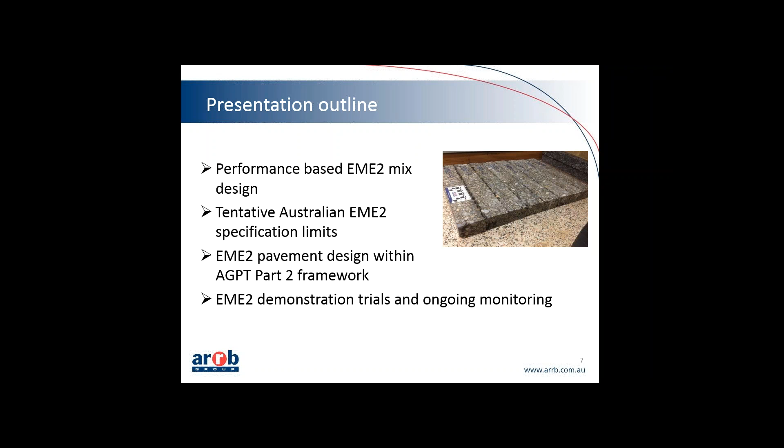Then EME2 pavement design within the Austroads guide. We've looked at how to use EME2 within the framework of the normal pavement design guide in Australia, and we'll be talking about that. And then finally we'll be talking about the EME2 demonstration trials that have been installed to date.

So then to Nizam's question, why would I be using EME2? Well, EME2 has got some quite unique properties when compared to conventional asphalt mixes. It's very workable due to the high binder content, but the end product is very stiff, hence the name, high modulus asphalt.

Rut resistant, it's fatigue resistant due to the high binder content, and finally it's moisture resistant. And this is thanks to the high binder content.

We're using about 6% binder by mass of aggregate, and that is of a hard binder. It's a new binder type for Australia, with a penetration value - so it's a European specification - a pen value of between 10 and 25.

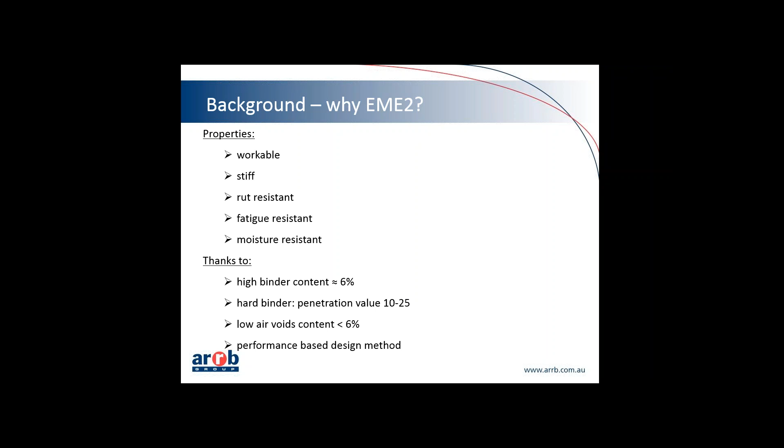It's compacted to a low air voids content, at least below 6%, but we aim for about 4% construction voids. And most importantly of all, it's strictly a performance-based design method, and that's what sets it apart from conventional asphalt mixes in Australia - we design it to be workable, stiff, rut resistant, fatigue resistant, and moisture resistant. That's what we'll discuss in this presentation.

The second part of the answer to why we'll be using EME2 is because it basically leads to thinner pavements. This is a snapshot from the French catalog design guide, comparing pavement structures with conventional GB3 asphalt materials versus an EME2 structure, and you'll see that on average it leads to about 25% design thickness reduction. We've shown similar results for Australian pavement designs.

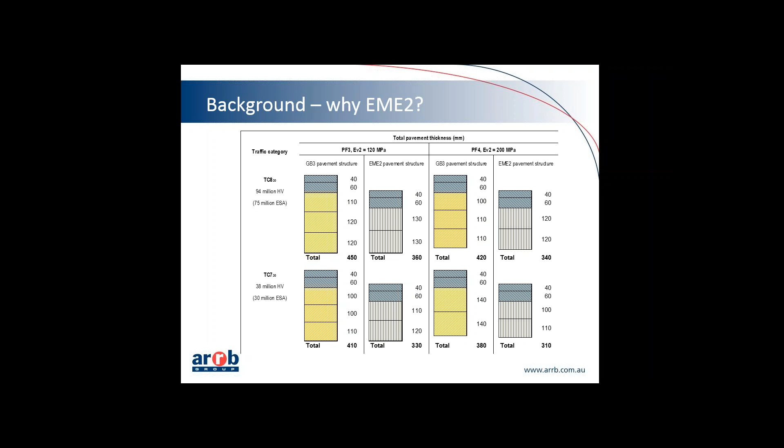Eric mentioned the very high binder content, which is about 6%. On the top of this slide, you can see a normal DG20 HM mix, which is a heavy-duty dense graded asphalt in Queensland, a typical one. Binder content is roughly around 4% of the mix by weight, and that would be around 5.6 to 6% for the EME2. If you convert that into the volumetrics, you can see on the second columns of each chart that the binder volume is quite high for the EME.

And Eric mentioned a 6% air void for the EME - this is what we target. But what we target, that's the maximum, so we would like to see rather lower air voids with the EME.

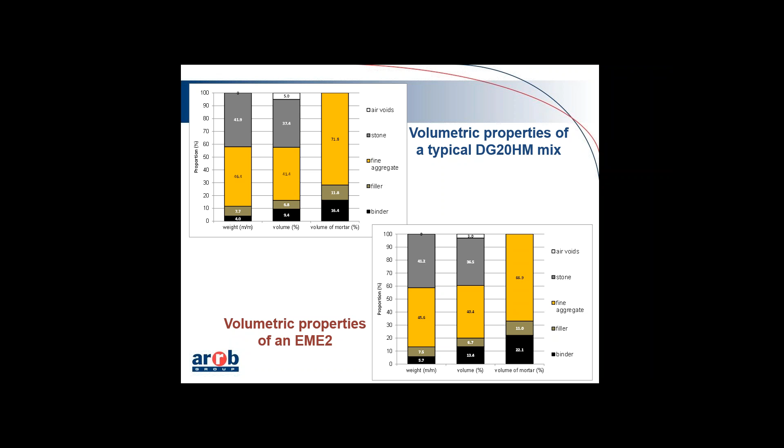How do we specify EME2? That is relatively simple. This is a snapshot out of the French specification for asphalt, for dense graded asphalt. If you go to the highlighted row, that gives you all the specification requirements which you have to meet for an EME2 14 mil aggregate size. That specifies the volumetrics, the workability, the moisture sensitivity, wheel tracking, stiffness, and fatigue. So it's really quite simple if you put it that way.

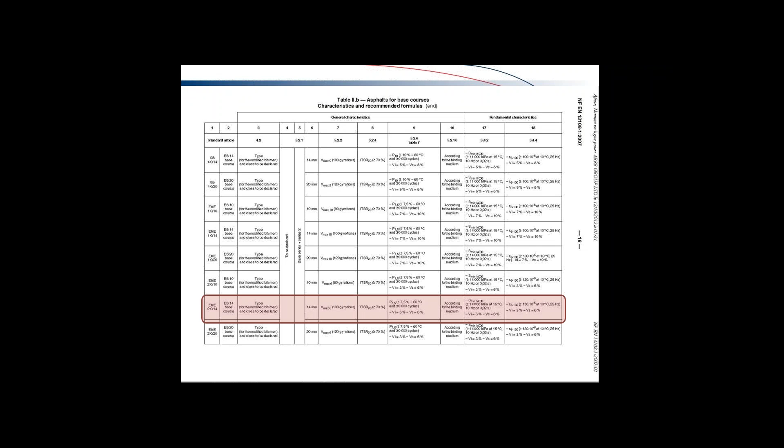But we are going to give you more details about the difficulties in how to come up with an EME design. You may wonder why do we call it EME2, because that's class 2. The class 1, highlighted in blue on this chart, is EME1. It's not really used in France, but the difference is in the fatigue performance - that's only one single number, 130 microstrain for the class 2 EME and 100 microstrain for the class 1 EME, but that little number makes the performance very different.

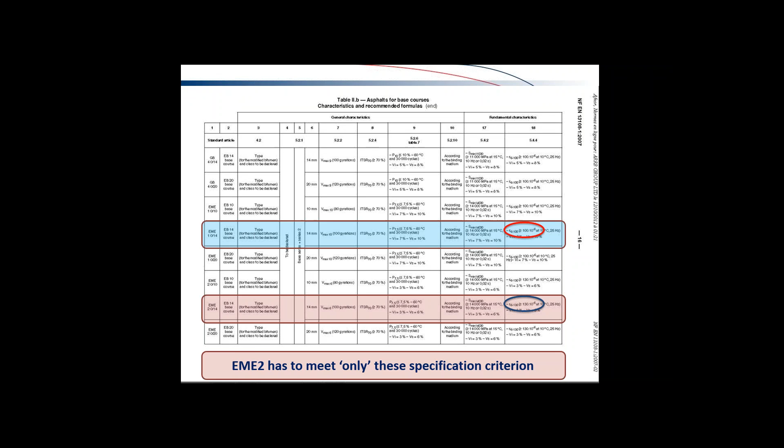Our presentation and our work relates to EME2, so we are not going to refer to EME1, even if we just leave out the post-nominal 2 - so EME always refers to EME2, in Australia. That's correct.

That table gives you a summary of what test methods are being used in France when you test and specify EME. That goes from level 0 to level 4, where you test the volumetrics and go through the workability, moisture sensitivity, wheel tracking, stiffness, and fatigue.

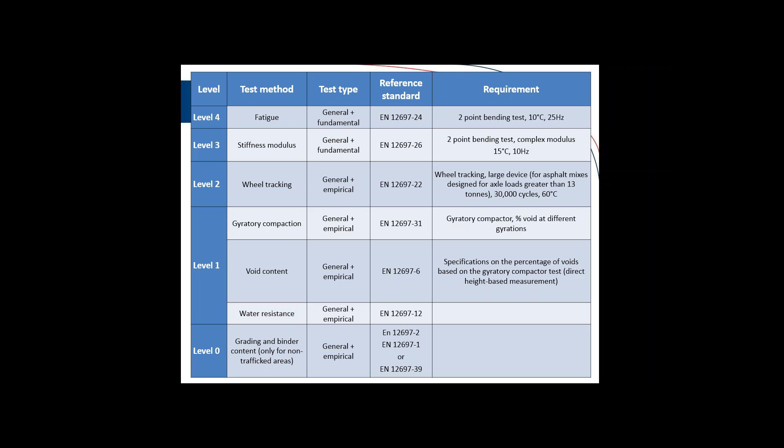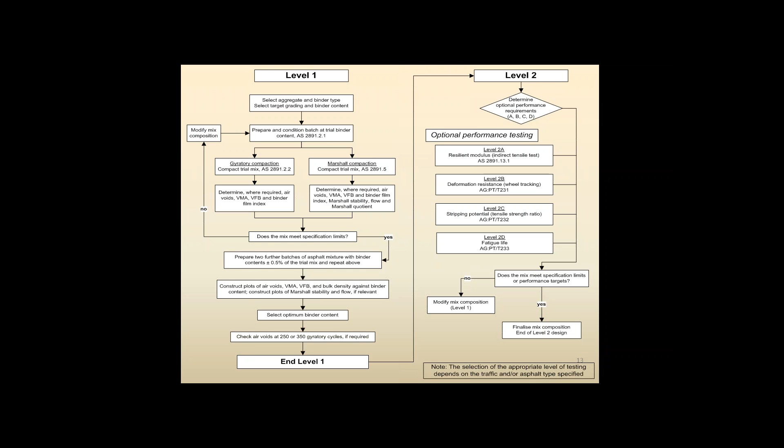In the Australian context, the level rather relates to a step, because on this chart you can see the updated design flow chart for asphalt in Australia. That's from AGPT Part 4B asphalt, and in Australia we specify level 1 and level 2, but within level 2 you can discover all these test methods which I just described for EME2 testing - moisture sensitivity, wheel tracking, deformation resistance, stiffness, and fatigue.

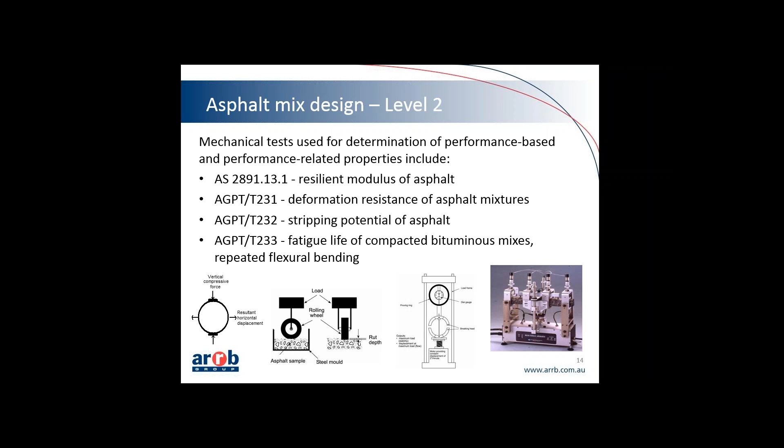The beauty of this project is that we do have all the test methods in Australia which need to be performed for designing an EME2, but unfortunately there are little differences between the European and the Australian test methods, and you cannot directly use the Australian test methods to design an EME2. So during the project we had to make some slight modifications to some of the test methods, and we did it with the knowledge and support of industry, that any changes or modification in the parameters is supported as long as there is a clear technical reason for that. That is all explained in the recent EME2 report, which is available on the Austroads website.

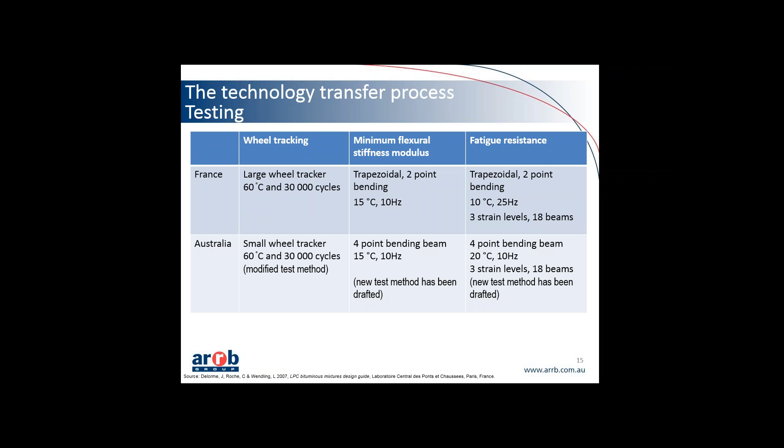Just to give you an example, for the wheel tracker or the wheel tracking: in France they use the large wheel tracker, 60 degree, 30,000 cycles, while in Australia all the laboratories are equipped with a small wheel tracker. We do the test at 60 degree, but we run it only to 5,000 cycles, which is 10,000 passes. So that is really a big difference, and you can see the pictures of these different equipment.

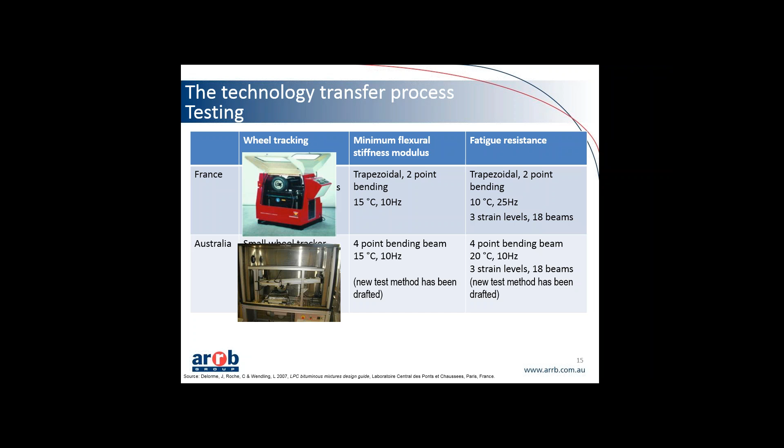The same happens to the stiffness and the fatigue. In France, the trapezoidal 2-point bending test is used for the stiffness and fatigue, and in Australia we use the 4-point bending test method, and there are also differences in the strain levels and the temperature and the hertz.

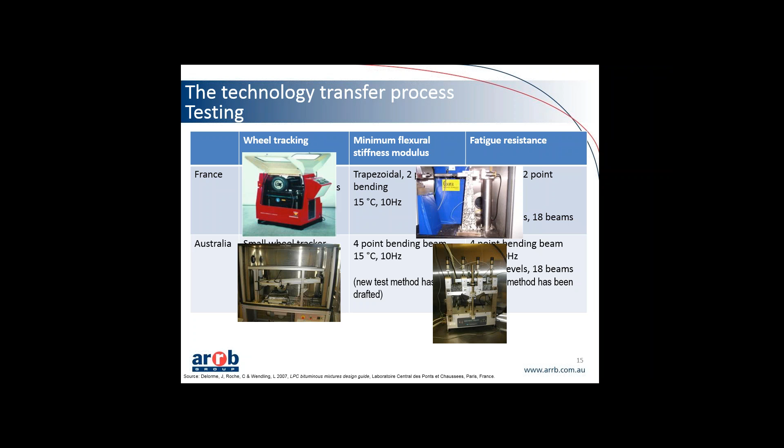This slide explains the process we went through in developing Australian specification limits for different performance parameters using the test method Laszlo just explained. We used an existing EME2 mix design from France with proven performance, knowing its performance in French test methods. Then in Australia we tested the same mix using Australian test methods for similar performance parameters, which became the benchmark from which we departed.

This was also supported by industry, who went through the same process, sending materials to France for mix designs to be done. We then had comparative results from France and Australia, and based on that we went about setting specifications for the different Australian test methods.

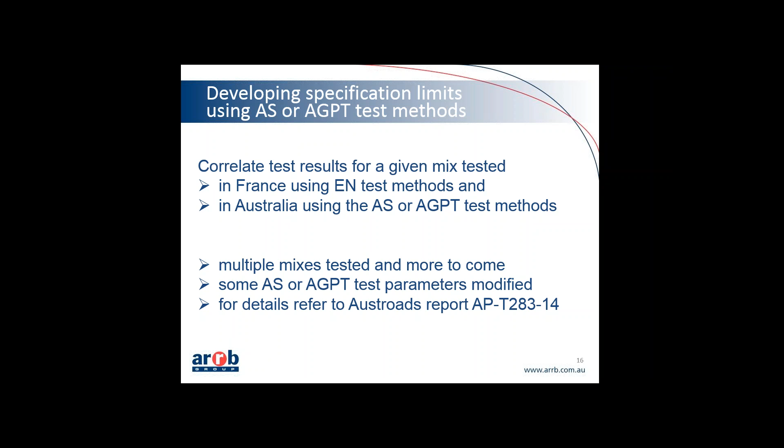Multiple mixes were tested, and that process is still ongoing. Some Australian standard and Austroads guide to pavement technology test methods were slightly modified, as Laszlo alluded to, and the details are in the Austroads report on this project.

So these are the tentative or interim specifications that we got to for EME2 mix designs using Australian methods. Through the process from the last slide, we developed the following specifications. In terms of workability, that is air voids in specimens compacted by gyratory compactor, we set a maximum value of 6%.

Water sensitivity, we used a modified Lottman test, where in France they used the Duriez test. A minimum retained tensile strength ratio of 80%. Wheel tracking at 60 degrees C and 30,000 cycles, which is slightly different from the current conventional method in Australia with more cycles. A maximum rut depth of 6 millimeters in AGPT T231.

Minimum stiffness modulus - this is high modulus asphalt after all. There's a requirement for minimum stiffness at 15 degrees and 10 hertz of 14 gigapascals in the flexural bending test. The flexural bending test has been updated to make this possible, and we're now testing in a sinusoidal loading mode.

Then fatigue resistance, using the same test method at 20 degrees, 10 hertz. We're testing a minimum of 18 specimens with 6 specimens per strain level to determine a fatigue equation for the material. We have a minimum strain level to 1 million load repetitions of 150 microstrain, again in sinusoidal loading mode.

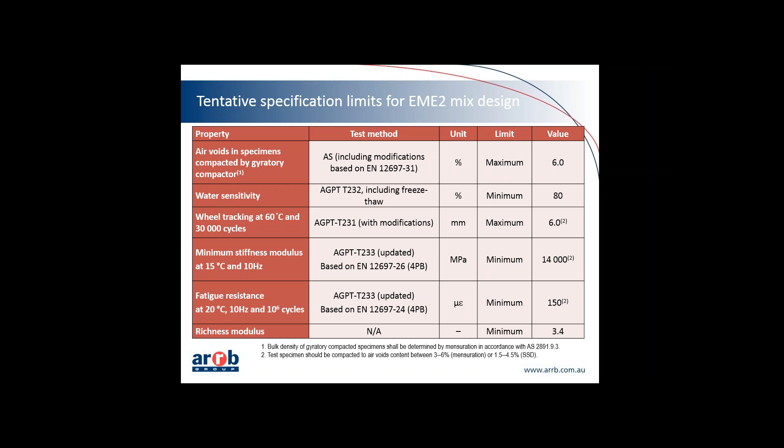You still need to start with a conventional asphalt design. So we talked about how you specify EME2. Now we'll talk a little bit about how you make an EME2 design. In the French guidelines you can find some guidance or control points for the grading, but these are not specification requirements - it's just a good starting point that gives you a good understanding of what you can get out of the mix.

In Australia, we specify EME2 as an EME2 14mm mix, where you have the maximum aggregate size at 19 millimeters, and there aren't any specification requirements for the aggregate grading for the mix.

Before you continue, can you let us know where you would use this mix in the pavement structure, and also what the thickness of the layer would typically be? Yes, sure - 14mil. This is a structural layer, not a wearing course. You can use it as a structural layer, or in certain cases as an intermediate layer. The layer thickness is between 70 millimeters and 130 millimeters for a 14mm aggregate size.

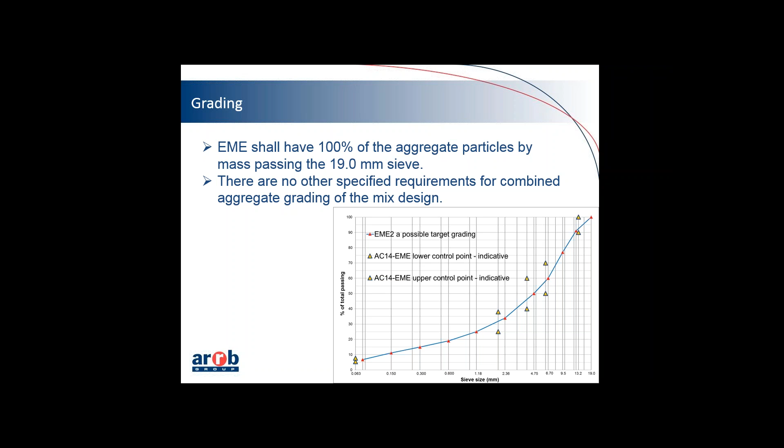With the binder content, as Eric already mentioned, you don't need to meet a minimum binder by mass requirement, but you need to meet a minimum requirement for a binder film index, called the K value in the French specification. This equation was modified to include the binder content as we specified in Australia, which is the binder content by the mass of the total asphalt mix.

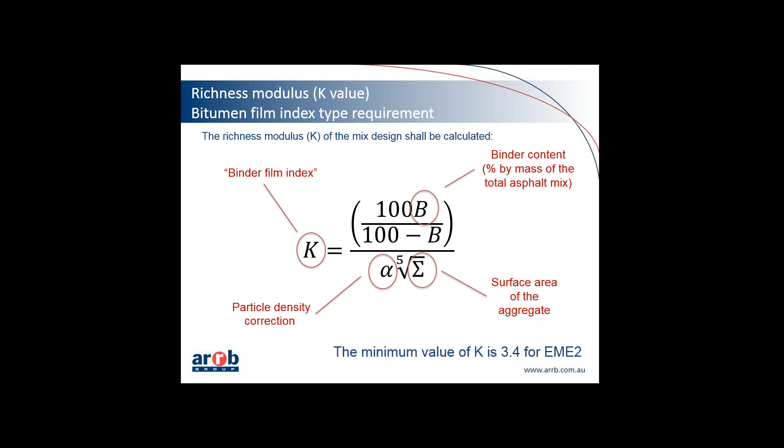You can also see that includes the surface area and some correction for the particle density. For an EME2, you have to meet a minimum 3.4 K value. All the details are described in the Austroads report. I won't talk about that now, but I'll give an example for the previous grading. For that grading, having an aggregate density of 2.65, you would have a minimum of 5.3% binder by the total mix if you want to meet the minimum K value of 3.4.

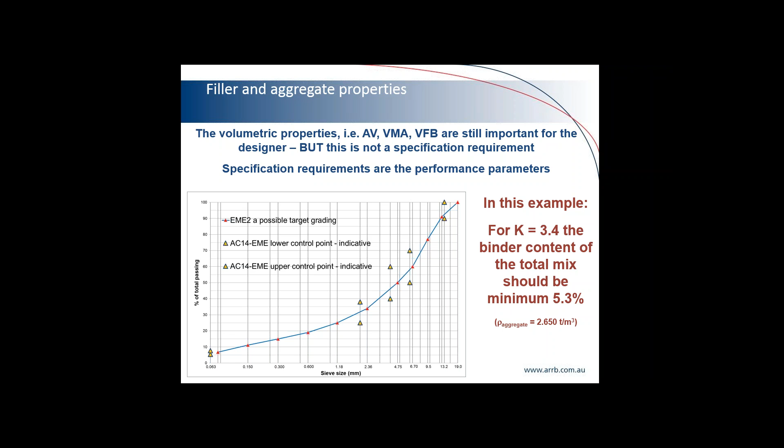I need to mention that even though the air void content, the VMA, the VFB are not specification requirements, the designer still uses them to come up with a reasonable mix. So that's the starting point. But the big difference is that this is not a specification requirement. The specification requirements are what Eric has just listed on the table: workability, moisture sensitivity, wheel tracking, stiffness, and fatigue.

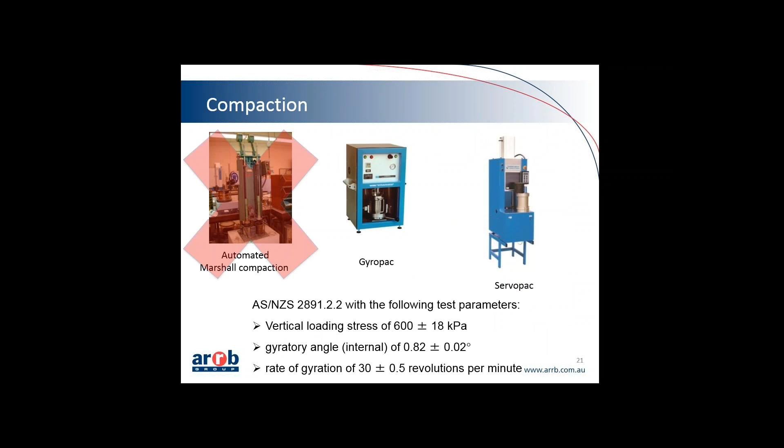It's a very important component of the EME2 mix design, how you compact your laboratory samples. In Australia, we can use the automated Marshall compaction, and for gyratory compaction we have two different equipment types, the gyropac and the servopac. But for EME2 design, only the servopac can be used. The reason is because the vertical loading stress and the gyratory angle, the rate of gyration, is different to those parameters described in the relevant Australian standard.

The reason we specify this and make it different to the relevant Austroads specification is because these parameters are used in France, and this compaction in the lab is related and validated against field compaction of the mix. So it's very important that already in the design phase you collect information about the workability of your mix and how it would perform in place when you try to pave it.

This is very different from what people may be used to in conventional mix design. You would target a minimum and a maximum air void content. In terms of the EME, we only have a maximum air void content because you want the mix to be workable. In situ, you can reach quite close to zero air void content, but this is where the performance parameters step in, because you can make your mix close to zero, but in that case your mix may be unstable and fail during the wheel tracking test. So it's not an easy game, it's quite exciting and requires a lot of experience.

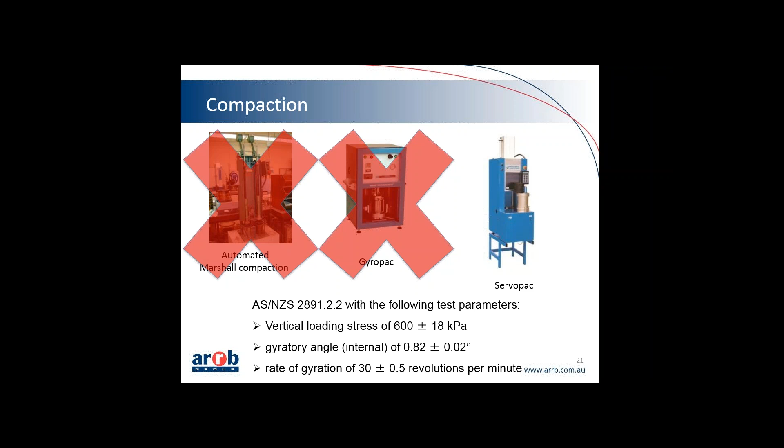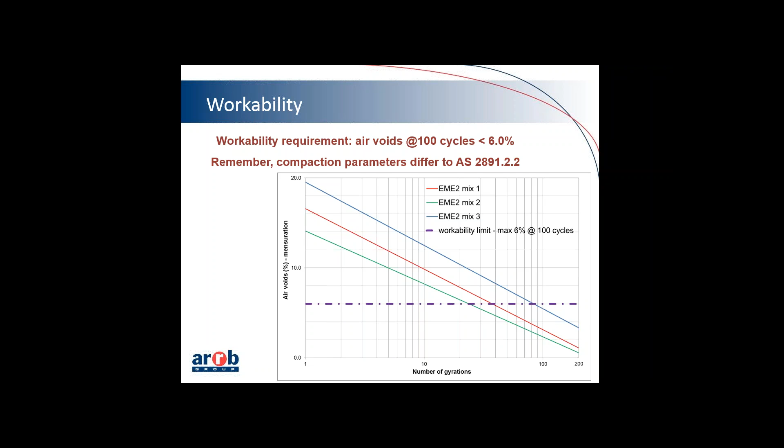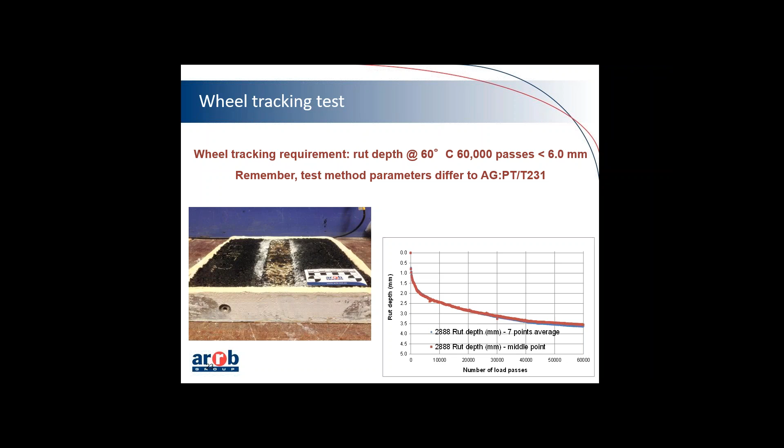For the wheel tracking test, from the shape of the specimen you can see we are using the small wheel tracker in Australia, and as mentioned earlier, that is a significant change to the current test method. That's 6 times the number of passes for the EME2 compared to any normal testing, which is 10,000 passes currently. So we put the EME2 to a very harsh condition, and we specify a maximum rut depth of 6 millimeters. Flexure modulus, minimum of 14,000 MPa using the 4-point bending, 15 degrees and 10 Hertz.

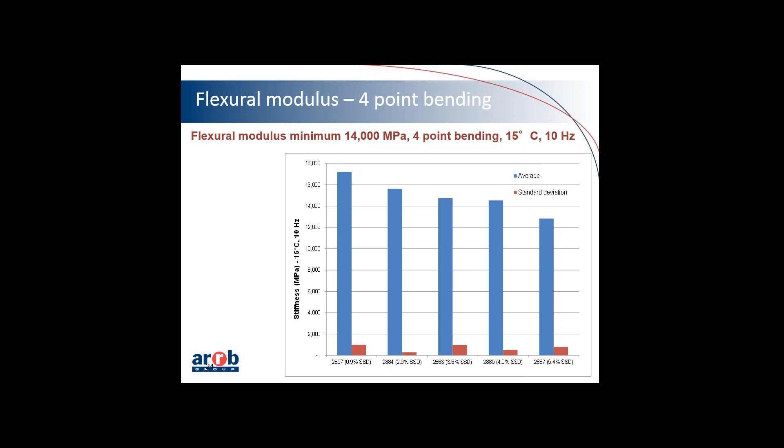And finally, the fatigue: 3 strain level, 18 beams, is what we specify for EME2, because we would like to have a very stable, very robust, and very reliable testing. The specification refers to 20-degree testing.

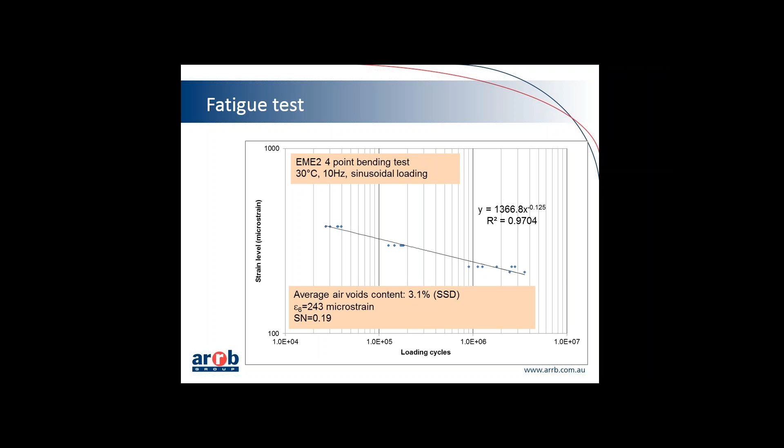Maybe people might wonder why 18 beams. Well, that's because typically you would see a lot more scatter than you see in this nicely grouped fatigue results. And you're absolutely right, Eric, but just to make sure that all test results are compatible and reliable, we specify the SN number, which is also in the European test method. So with 0.19, this is a perfect fatigue curve.

Why do we do all that difficult work with the fatigue and the stiffness, which is the last phase of the mix design? Because those two parameters go straight into the pavement design, at least in France at the moment.

And the benefit of doing so is you can do your pavement design at any temperature which is representative for your local condition, and you can also make improvements to your mix, and that enables innovation, which calls for a more optimized mix and pavement design together.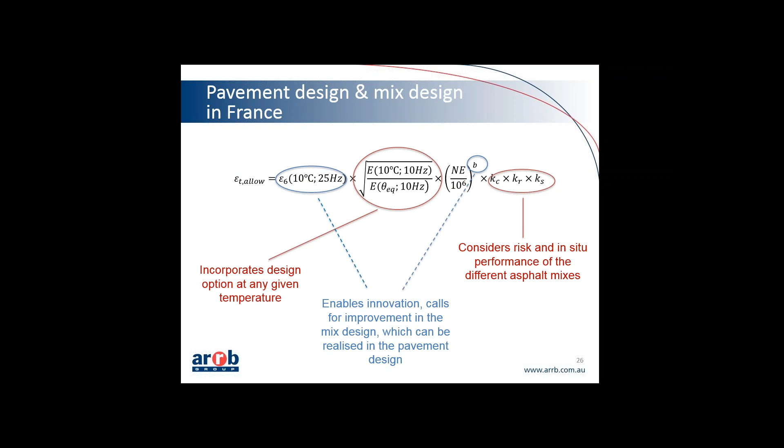You certainly have to consider the shear factors and the risk factors in the design, and that's the French methodology. And Eric is going to give us an update on the Australian way.

Laszlo just gave an example of how in France the fatigue performance in the laboratory is linked to the prediction of fatigue performance in the field. In Australia, for the moment, we are using the Shell fatigue equation, shown on this slide, also for the work we've done implementing EME and pavement design, for instance, for the Queensland Department of Transport.

We're using this equation, which is fine for EME, but it does not allow mix-specific fatigue equations to be used for the moment. So currently within Australia, we just design for EME as you would for any other asphalt mix, using the Shell fatigue equation.

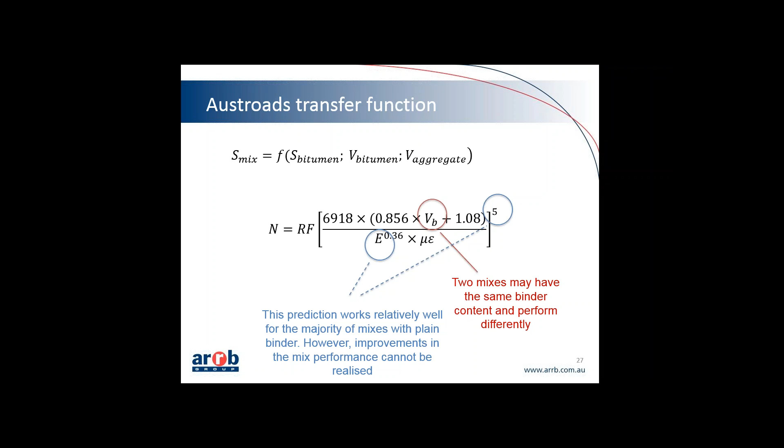That's for the time being. Yes.

Okay, then in terms of the selection of aggregates, this is just a guideline to help people design these mixes. So we don't use natural sand, only crushed aggregates, relatively high quality aggregates.

We're using no hydrated lime in the mix. Aggregate and filler selection should consider workability of the mix. And currently we're not using RAP or warm mix asphalt, so you will not see that mentioned in the reports on these trials.

However, that is definitely part of the future. There's no reason why you wouldn't use RAP or warm mix asphalt, or construct EME as a warm mix asphalt.

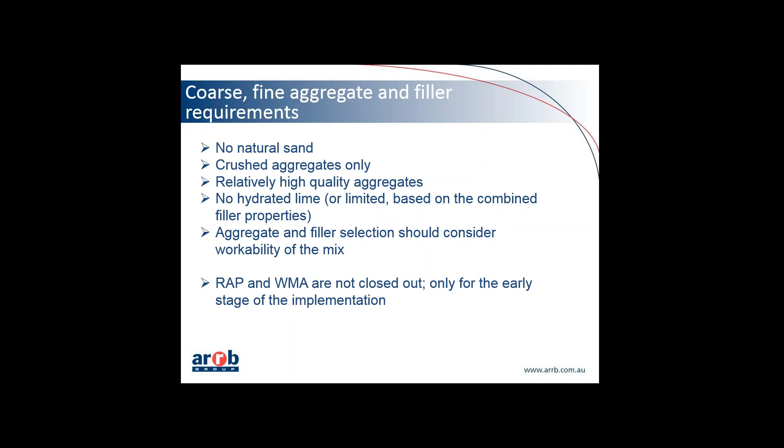Then these are just an overview of the binder requirements. Again, currently there is no Australian specification for the type of hard binders that we use in EME, which means that we're using the European spec, and what's shown on the screen is the specification for the 15/25 binder. You could also use a 10/20 type binder.

So what is important in this is how the penetration is between 15 and 25, and then softening point is also important in terms of the European specification.

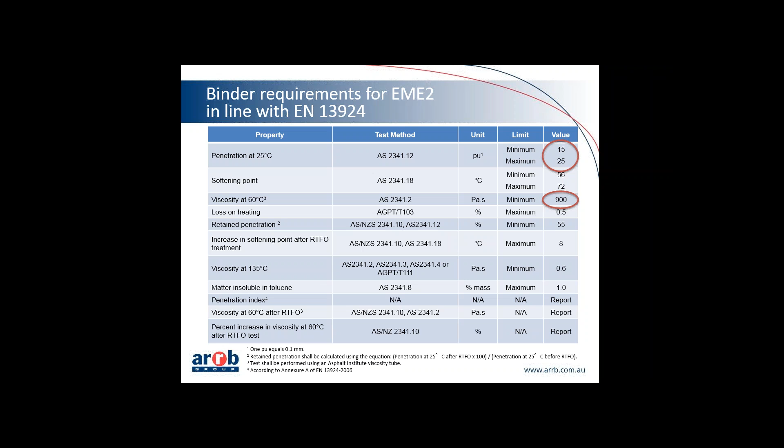One thing we need to highlight is that the viscosity spec, like we use in Australia, is just a minimum viscosity in this specification, and that is not the main parameter they use to specify binders in Europe. So this minimum value is just that, a minimum value. A typical EME or penetration grade binder will have a viscosity well north of this 900 Pascal seconds.

Okay, then just a quick overview of the national work on EME in Australia. A couple of years ago we had an exploratory study where we basically showed that you can design EMEs in Australia as part of Austroads.

Now there's currently an Austroads project aimed at setting interim specification limits for Australian EME mix design. And also there's a project for the Department of Transport in Queensland which aims at coming up with design methods, basically allowing for pavement design using EME.

And industry has played a major part in supporting this. There's funding from Austroads, there's funding from TMR, and industry has played a major part in supporting these projects through testing and construction of trial sections.

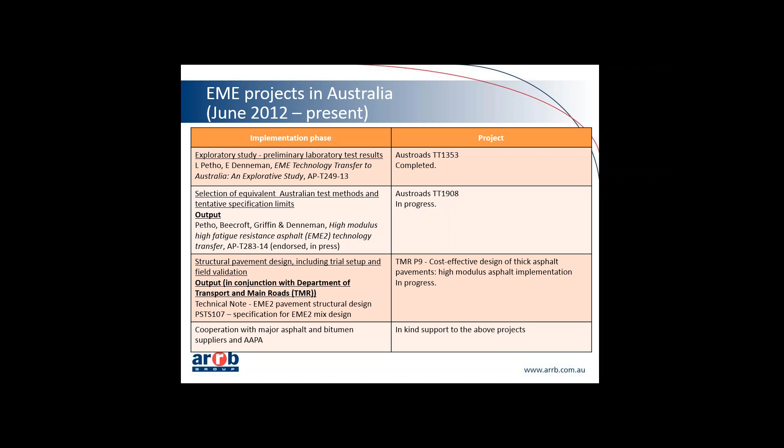Okay, Kathy, are you still there? Yeah, can you please check if anyone is awake out there? Yes, thank you, Laszlo. Everyone is awake and very attentive, judging by the number of questions coming through. Ian has confirmed he's awake as well, so thank you for that, Ian. Now, we do have some questions.

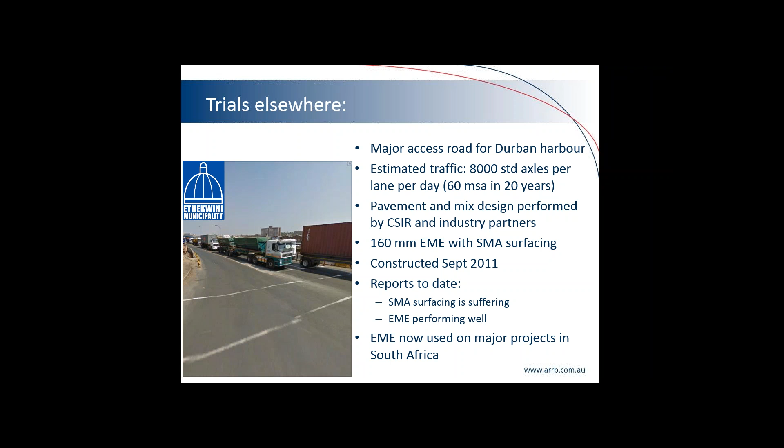So that's just background on trials elsewhere in the world.

And we already have had a trial here in Queensland, the first one in Australia, and that trial was constructed exactly a year ago. It was placed in Eagle Farm, on Cullen Avenue, and this is actually an access road to an asphalt plant. It's a dead-end road, so we can monitor the traffic very well, and we certainly have very heavy traffic on this 250-meter long road section.

And we had many objectives for this trial, because that was the very first in Australia. The three main items to monitor were the construction and production. We had questions before that - do we need gritting, for example, on the surface of the EME if we want to leave it open for the traffic before the wearing course goes down, or can we meet the production tolerances?

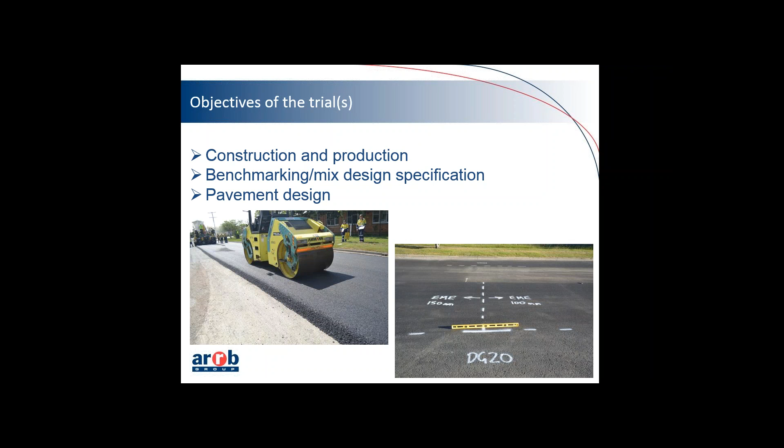But since then, despite the hot weather in Queensland, this trial has been performing very well, and we have been monitoring that in terms of falling weight deflectometer testing. We also monitored the functional performance, which is rutting, IRI and surface texture, and we certainly review that in light of the pavement design. But at the moment we haven't seen any failure, not even a single one on this road section. So I'm not sure how long it would take to have it fail, but we will see.

So at the moment we know everything about the pavement, because we implemented with the help of industry a weather station on site - we know everything about the pavement temperatures and the environment, the climate. There are other trials coming up in New South Wales and in Victoria.

The Victorian trial, we just had a working group meeting this morning, and it's very promising. We would love to see more EME trials in the country. Very soon, we are hoping for a couple of months, 2 or 3 months at the latest.

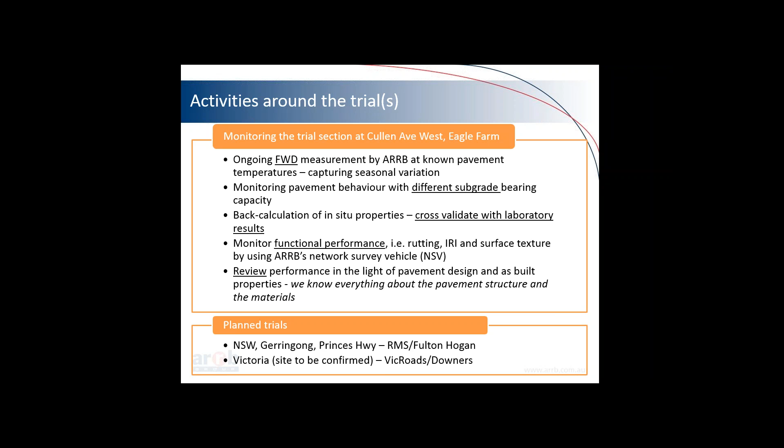Why was the trial in Queensland so successful? Because we had many parties interested in this project, and every organization and the people behind it did a very good job, not only in preparation but on site and after construction in terms of monitoring.

The key partners in the Queensland trial were Boral Asphalt, Sami Bitumen, Brisbane City Council, the Australian Asphalt Pavement Association, and the Department of Transport and Main Roads. We had significant input from Colas International technical staff and our own project team from the Brisbane office, and we've been using our Melbourne laboratory extensively on this project.

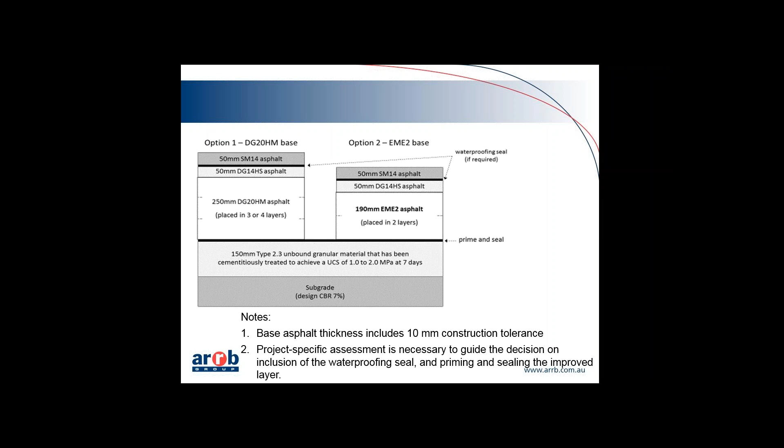And that's basically about the trials, Cathy. Before we wrap up, do we have any immediate questions? Thank you, Laszlo. We have many immediate questions. I'm doing my best to try and answer them here.

We have a couple of comments I'll start with. Warren has told us there's an EME trial starting in the Gold Coast next week. Okay, that's good to know. Thanks, Warren, thanks for that. We will certainly follow up. Sorry, Sunshine Coast, I got that wrong. Sunshine Coast.

Thanks, Warren. The other questions are around - this one's addressed to you, Eric. You may be aware of the recent trials in Durban, South Africa, that have incorporated RAP in the EME design. It was in the latest SABITA newsletter. Any comments?

Yes, I saw that, and that is very encouraging. I actually think that our original design that went down in Durban had RAP in it as well, pretty sure. We also did some trials with warm mix asphalt back then too. So yeah, it's really encouraging to see how it's taken off in South Africa. I think they had some problems with the availability of the binder. I'm also pleased to say that in Australia we now have 3 producers, if I'm not mistaken - 3 bitumen producers that can supply the binders within the specification. So that's great in terms of availability. I don't think that will cover the entire country yet, but we're getting there. Yeah, so it's great to have this feedback from South Africa.

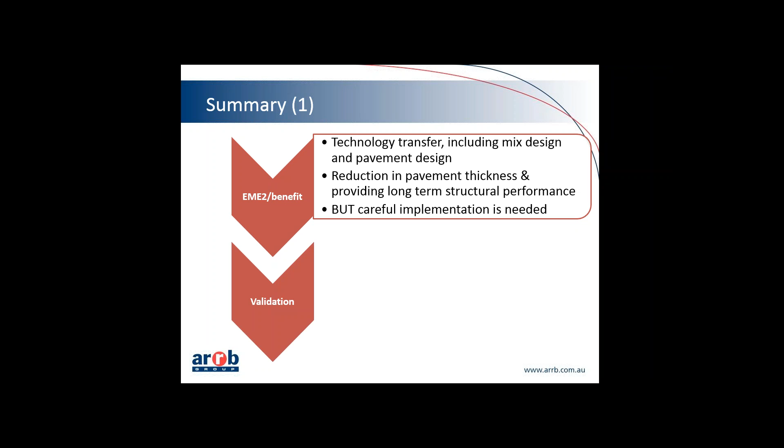Yes, so we have been very careful that we transfer the technology, and that includes the design philosophy, which is strictly performance-based. In a way, we hope that EME2 is a vehicle to introduce more performance-based mix design to Australia. So for validation, we went through extensive laboratory testing, and I think we cannot stress enough that these trials are really demonstration trials. This is a proven technology, and we went through a lot of effort to make sure that the technology we implemented in Australia is equivalent to the technology in France.

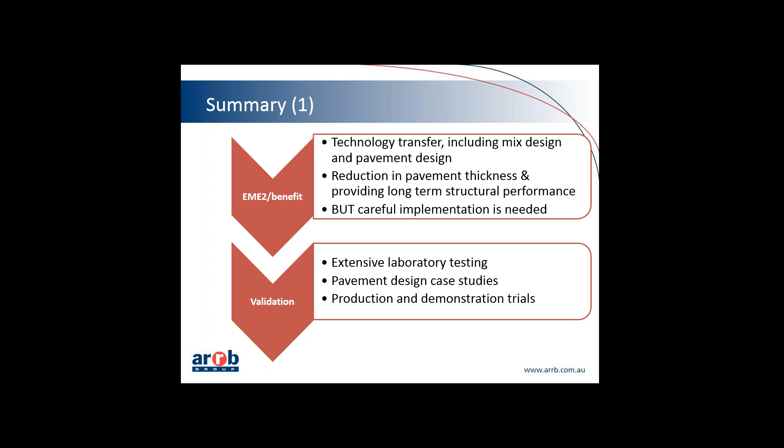So there will be more production and demonstration trials. I think the trial Warren alluded to just a moment ago is a new production trial and a new EME mix in Queensland. So that's great news. More and more mixes become available. There are various asphalt producers who actually have more than one mix in various locations around the country. So it's really being rolled out at the moment.

So the current status: we have Australian mix design requirements, and there's a pavement design framework that we developed for the Department of Transport and Main Roads here in Queensland. So the next step is for other road agencies to hopefully jump on board and start rolling this out more widely. From the support we've gotten, we cannot emphasize enough the role of the different road agencies, Austroads, and industry in developing this. It's been a big collaborative project with a great outcome, and I hope we'll do a lot more technologies like this in the future.